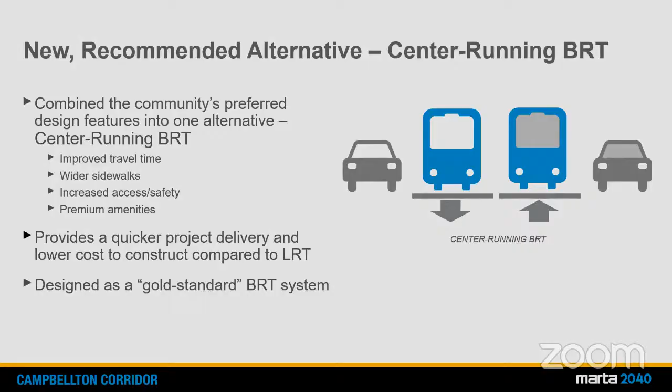It's a new type of service for the Richmond area. It's high quality, high capacity, rapid transit service. We are still using buses, so rubber tires, absolutely, but we use a lot of the same design features like a light rail or a subway would that makes us faster, makes us more reliable, and we're able to provide more frequent service. Awesome. And what would you say makes it different than just your regular bus service? Well, there are a number of key design and technology features that make the Pulse totally different from anything else that we operate. And we're standing on one of those things that makes it different. It's the platform. So you're able to have platform level boarding where it's very easy to get on and off the bus through both the front and the back doors. That means as well that the operator is able to dock seamlessly and then keep on moving after everyone gets on and off. There's something else that's missing from the bus itself, and it's a fare box. So you're going to pay for your bus fare before you ever get on, and that happens right here at the platform at the ticket vending machine. We still accept cash, coin, we'll issue change, and we will accept credit and debit.

So as you all can see from the video, the Pulse provides premium BRT center running design features and operations similar to what we're proposing for the Campbellton Road corridor. It includes center running transit lanes, transit signal priority, and enhanced station amenities with real-time arrival information and pre-board ticketing.

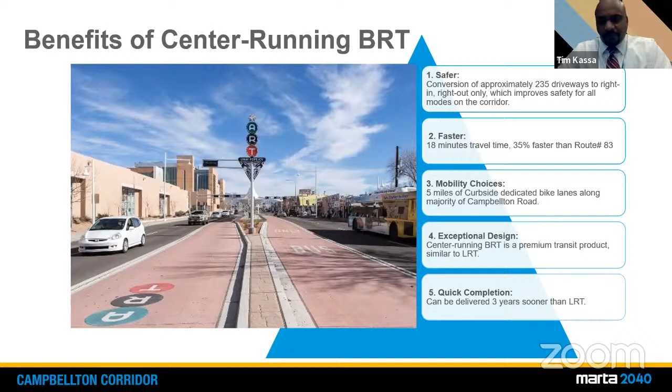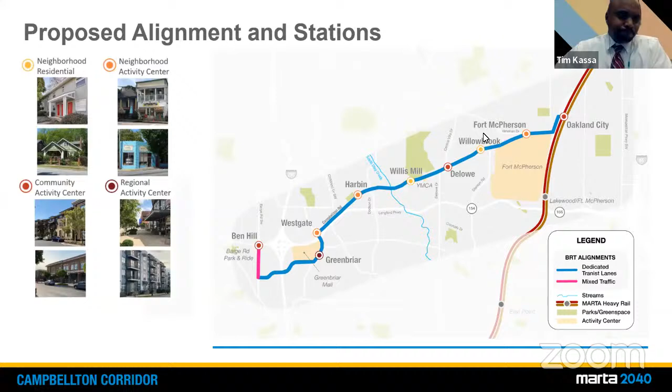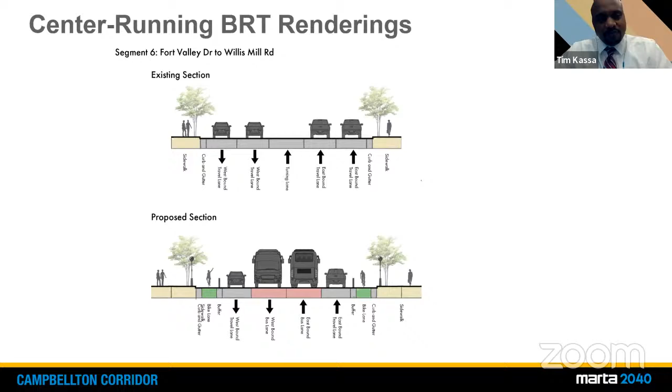If you go down to the bottom, where it's the proposed section, this is how it could look with the center running BRT. And what I want you to take note of is look how much wider the sidewalks are in the proposed section compared to the existing section. These are some of the benefits that I had pointed out earlier that the center running BRT is going to provide. Wider sidewalks, you have bike lanes on both sides of the roadway. Your BRT transit vehicles are in the center of the roadway, and your travel lanes are on the outside. Now let's advance to the next slide, where we can give you an actual rendering of how it will look with the proposed BRT service in the community.

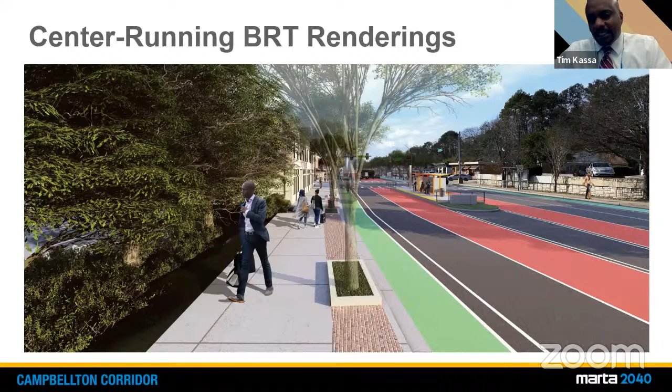Lastly, look at the station in the middle. The station's in the middle of the roadway. If you look off to the backdrop, that's a crosswalk. So one could get from the sidewalk over to the station, where the bus will pick up would-be riders to carry them to the next destination. Like I said, the next couple of slides just give you another vantage point of how it can look. So we can advance the slide, give it from another view.

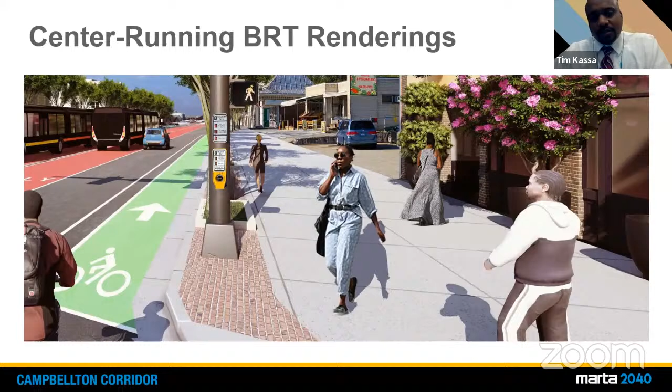In this picture, you see the bike lane, the blue car is in the travel lane with the buses in the middle, and the wider sidewalks to your right. So those are, again, to give you renderings of how the BRT service could look in the actual corridor. We can advance the slide, please.

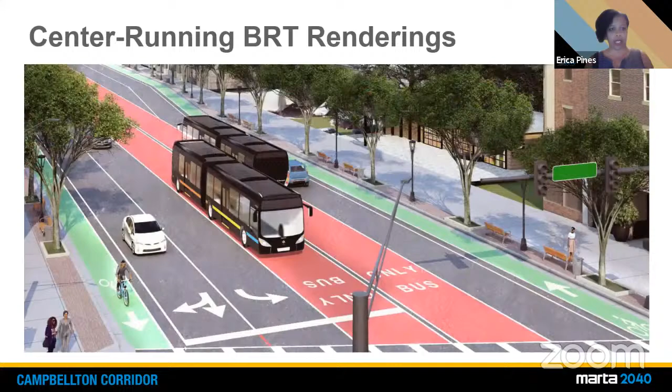Yes, there's a lot of rhetoric that the community chose LRT. Can we go back to the slide on what the community actually chose, please, Melanie? Because if you guys have some proof that we don't have, that the community chose LRT overwhelmingly, please send it to us because we don't have that information.

And just so that everyone is aware, we went on the trains, on the buses, to the apartment complexes, to the churches. A lot of people that are in this chat, Sherry Williams, have been at all of our engagements. And when we first started this, there was so much excitement about BRT. There was excitement about BRT throughout all of these discussions.

We received paper surveys, handwritten surveys, and we talked to our customers, and it was 45% preferred BRT and 43% preferred LRT. I just want to set the record straight on that because a lot of the comments are saying the community chose LRT. The community was actually split. And what we did was we tried to come up with a project that could satisfy as many of those needs from the participants that we heard in the survey. Okay, thank you. Thank you, Erica.

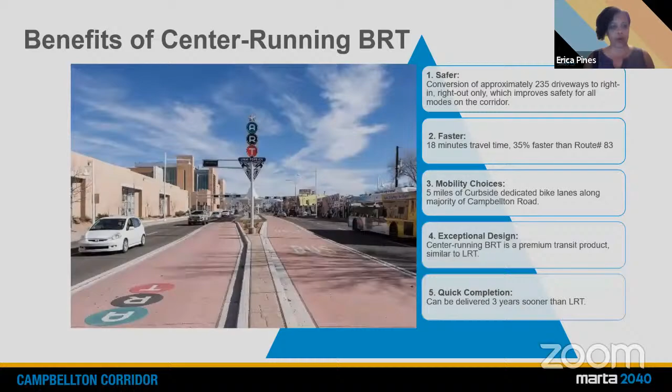Thank you, Erica. Erica, I've gotten down to the bottom of the Q&A in terms of questions posed. Okay, and thank you, Tim. Looking at the Q&A, there were some questions that were duplicative. Thank you, Tim, for trying to get to as many as possible. Melanie, if we can go back to that last slide, that would be great. If somebody could drop the virtual meeting room in the chat, that would be great. We want to remind you to continue to stay engaged on this project and to also send us questions. We record everything because everything that we do is for the public record. The chat will be recorded into the record. The Q&A will be recorded into the record. And we present our findings to our leadership team and to our board of directors.

Please stay engaged on this project. Inform people about the meeting on Saturday. Let people know to attend, go into the virtual meeting room so that they can participate there and gain more information. If your question was not answered tonight, please email publichearinginfo@itsmarta.com or marno-bhb@itsmarta.com. And also, this discussion tonight was on the Campbellton Road proposed mode. If you have questions not related to this project, please send those to public hearing info.

If it's a service question, if it's something regarding shelters, I think I saw something about shelters under siege or something like that from you, Sherry, send those to our customer service department and we will make sure that we get those handled. It's very important if you have a service question that we get those to customer service, because those are logged and they have a timestamp on them that we have to in turn respond to. So if you want those situations addressed, please send those to customer service.